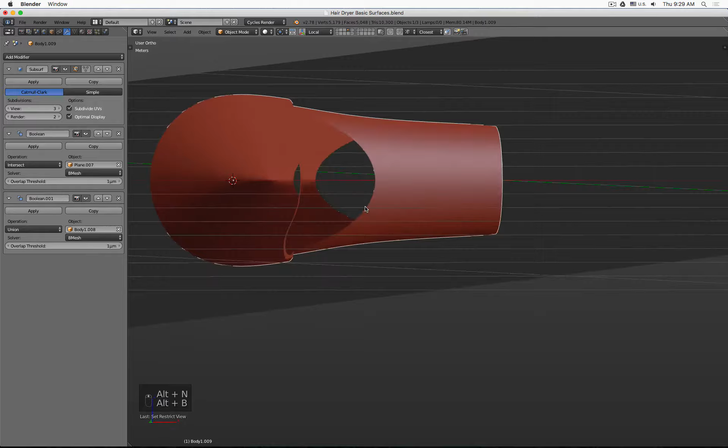So I hide the other part, so you can see now the result of this one. There, perfect, works pretty great. Okay.

So a little bit of cleaning stuff up and arranging areas. This one we call top outside, and let's say this is actually top inside. I'll move this one onto a different layer so it's gone.

Let's show the handle where it is. See now, it's pretty tight, also in their design it's pretty tight. Let's take a look at the top. Does this look nice? No, it looks not very good. So what can we change here?

So what happens if maybe these points I move a little bit to there? Let's say even this way. I see this bends better, and this bends better. So what we actually might not necessarily need, or do we need this?

Yeah, actually they did a cut even a little bit more different, so there and there. So that's a very simplistic way.

So we can maybe try to see how we can sculpt this a little bit more. Maybe this we push out more. And you see, there it is.

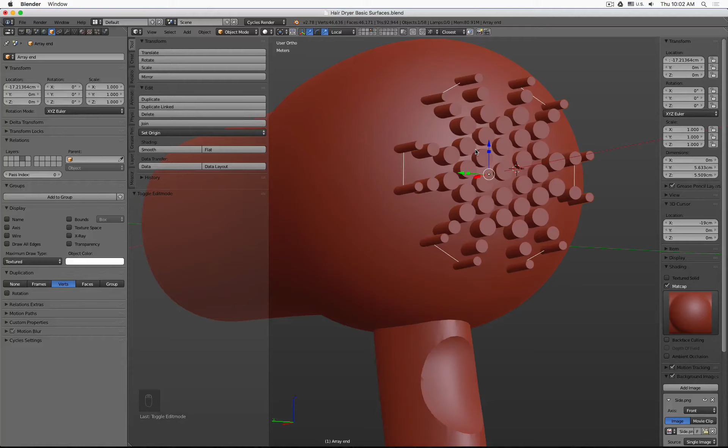So I have cleaned up my scene a little bit. Layer 2, everything for my top part. Layer 3, handle and button. And then layer 4, 5, and 6, the different parts.

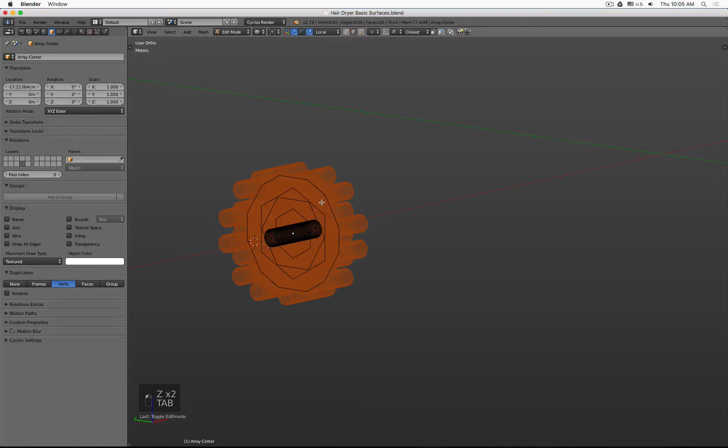And I would like to show you now how we can select or take everything and use it to create the surface intersections with our main body. The problem currently is we can't really select this and cut it out of this one, because if we take a look at it, what we have is actually just lines, and along these lines interactively this mesh is being instanced.

So what I would have to do is I can work with this kind of thing to explore maybe a pattern, but then I have to create tangible geometry. So I will do it with this one. What I will do is Shift D, make a copy, escape, and move it to a different layer. And now I can select, for example, this line here, which includes this object, which includes the lines along which we instance all these parts.

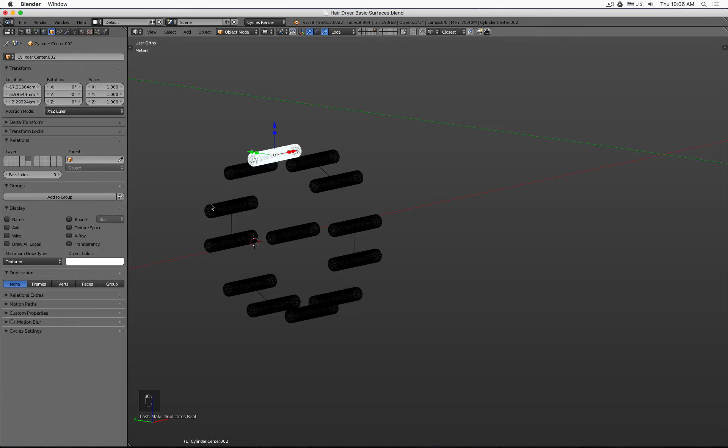Let's go and see where that function is. Object, apply, make duplicates real. Click this, and now there are all my objects. You see, pretty nice, so they're all positioned. Let's take a look at the mesh, and you know what's cool? They're all linked, so I can still adjust them all at once.

So this is going to be a little bit of click, click, click craziness, because I have so many rings I would like to add. So basically what I will do is maybe I select somewhere a master one. So let's say cylinder middle master. Okay. And then here I will, for example, add multiple unions. So union, union, union, and there, and there.

And the main reason why I do all this here is I do not have to add then all those modifier commands to the design tree of my handle. And there. Okay, so the object is middle master. Let's go to here, and then there. Let's see, this should work.

Boolean difference, middle master, cross fingers, and there it is. Nice.

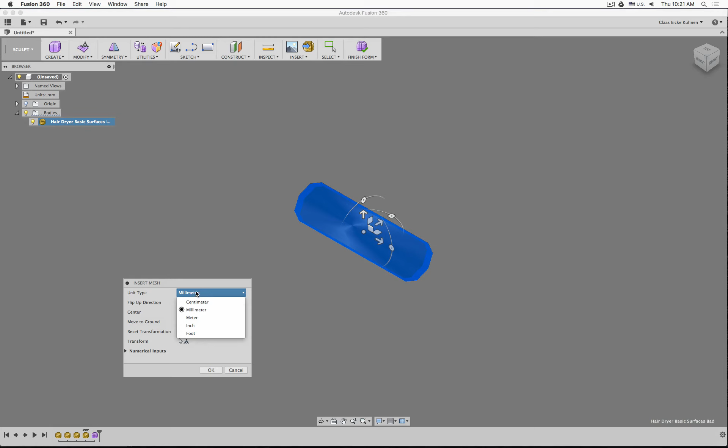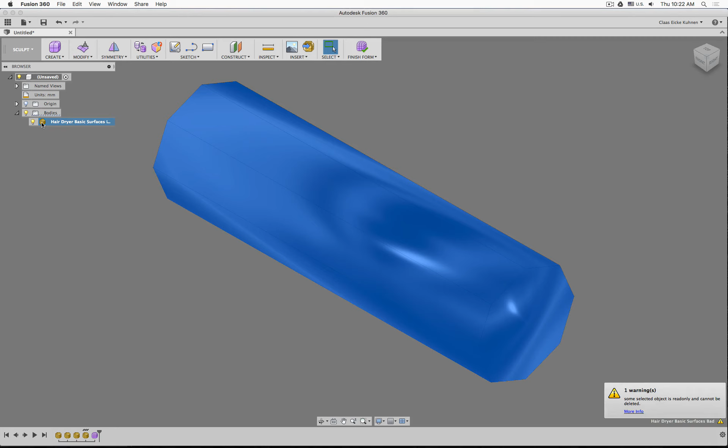I will insert the obj file, it comes over, we want to set it to meters. Let's go to convert, select this one, click OK, and then it complains, and that's because the caps are n-gons - Fusion currently doesn't like this anymore. It worked in previous versions, unfortunately, so we simply have to work with those open shells.

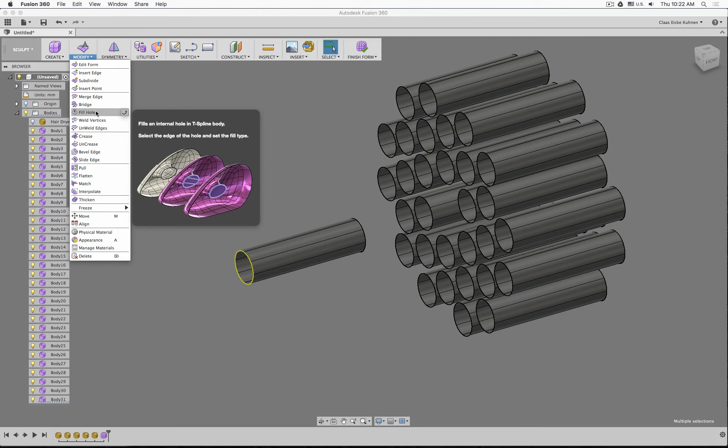Meter, okay, and then if we convert those, there we have it. Okay, there's actually an opening here which I could cap by using the fill hole command, and even I can say maintain crease, and I could say, let's say, fill star.

So it's kind of like an n-gon, and maybe here this one as well. There, it's all filled. Finish form, and there you see we have a cylinder. Ta-da!

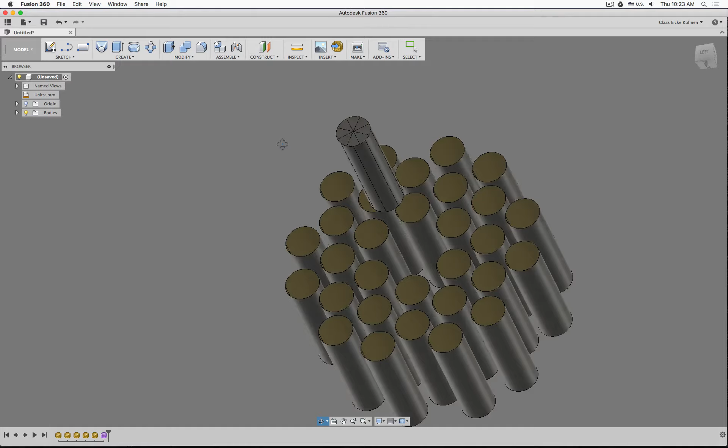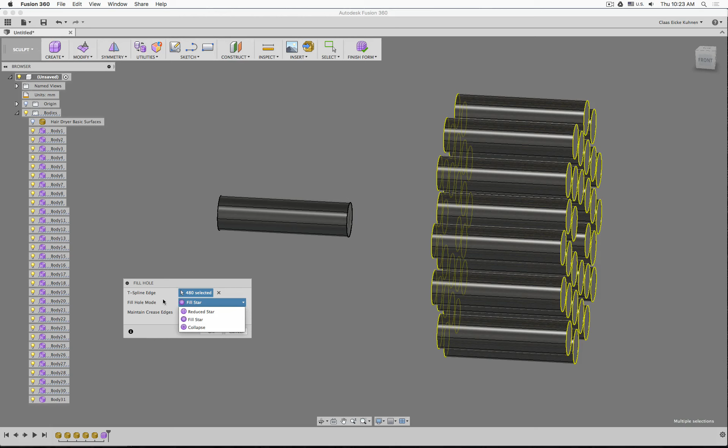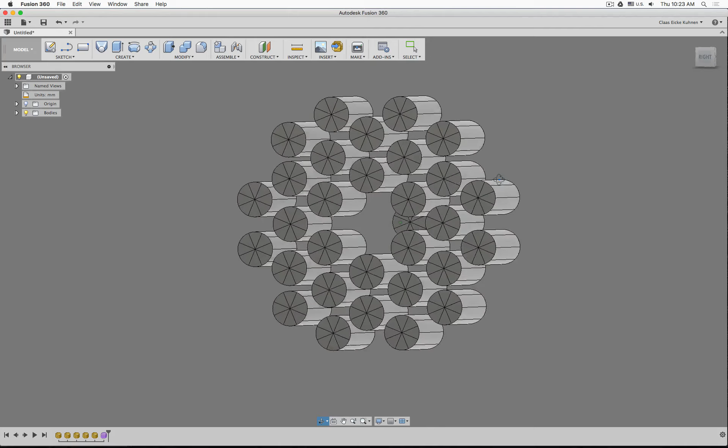Okay, so if we go back to here, select all those and shift-select all those and say fill hole. Takes a moment to calculate. Yeah, okay, and finish - takes a moment as well. And then we have basically exactly the cylinders transferred from sub-D polygon to sub-D T-spline to perfectly NURBS solid objects, which you see are all solid. We can then use these to cut out of the shell.

So let's go back to Blender, because I would say we've pretty much explored everything that's relevant for rebuilding this part. So then in the next video I can show you how we can bring all these objects over, and then, the same way we built this in Blender, we can recreate the geometry but create a more accurate CAD model based on our Blender model.